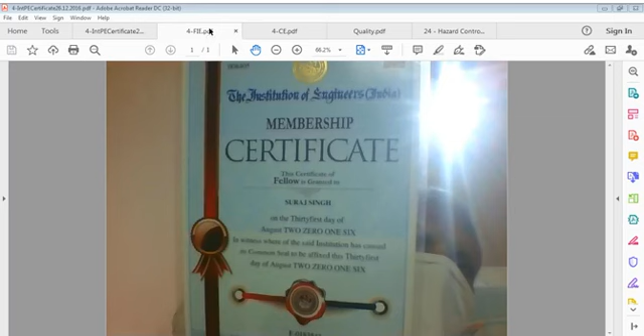Certificate is valuable only if you work, if you use that. Certificate has got no meaning if your product says no. Again I say, certificate is no guarantee. It's only a nameplate, nothing else. If you can't give quality, do not claim that you are a certified person. I don't accept a person who claims to be certified but whose product is quality-less.

That is a very important point I am making. It's not a joke. It's a question of transactions of billions and trillions of dollars around the world. You may say maybe you're expensive, maybe you're not, it doesn't matter. Expense doesn't come into the picture.

Maybe I am telling this, maybe there are millions of people who have the same experience, but some come out loudly and some digest it, because maybe I have bad time, I got a bad product, others don't, but I don't believe it.

When there is a lapse in quality, it's not for one product, it's for the complete function of that organization, that workshop, or that manufacturing unit or manufacturing industry. It's everywhere. There can be defects in composition, defects in size, defects in performance, a defect of whatever sort.

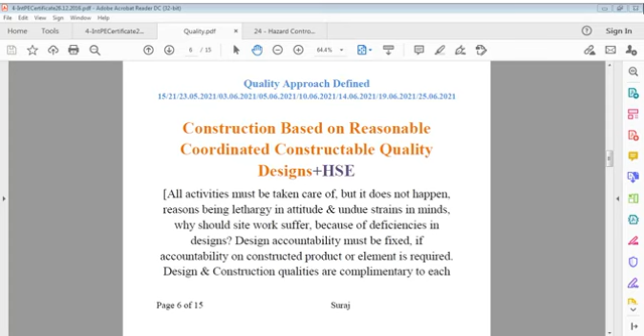Design accountability must be fixed. If accountability for a constructed product or element is required, design and construction or manufacturing qualities are complementary. I don't say that factories don't work properly - they work properly, but they do not care, they do not concentrate, because they start thinking of production only. And they never do proper maintenance, and even if they do, the product should be a good product. It doesn't happen. Or there may be some other problem, some other gap in controls which must be addressed, which must be open to everybody.

In factories or industrial units, everything is defined - method is defined, procedure is defined. But definition is not enough. Just definition on papers is not enough. It should be on work, in hand, in shop, on flow, in manufacturing unit. That should be there. But there is something somewhere incorrect or wrong that causes quality to fall. What is that? That must be discovered and traced out.

Because if you miss quality, the product is missed. If you can't commission, or even successfully commission and it breaks down, it's very disappointing. Yes, if it breaks down after say 1 or 2 years, that is acceptable sometimes because there can be many reasons for that. But if it doesn't work at all, and you are delivered a product you expect will perform well, and you find it's not performing well when you start it, what level of dissatisfaction do you have at that time?

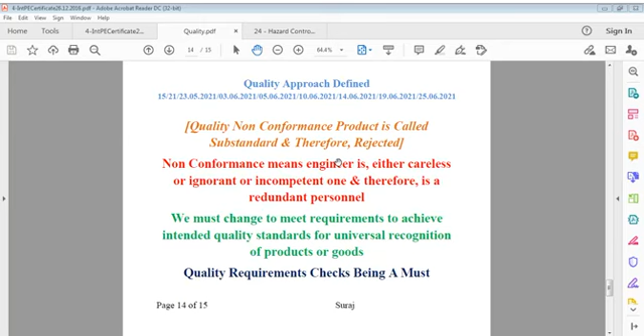Now I'll not go too much in depth of this, because every time I talk about this there's no meaning - I would only say at the end which is missing, what's missing. This simply says: quality non-performance, quality non-conformance product is called substandard and therefore must be rejected. Non-conformance means the engineer is either careless, ignorant, or incompetent, and therefore is redundant personnel. We must change to meet requirements to achieve intended quality standards for universal recognition of products or goods. Quality requirement checks being a must.

This missing factor we have to blame ourselves for regarding quality future failure. Engineering means quality application and continuous improvement of quality. No way exists to not comply with defined or specified quality levels, because definition of quality is a must, and that definition requires to be achieved, or else work leads to a status of being unsuccessful. This is the only message for everyone. It's very important we have to be mindful in that regard.

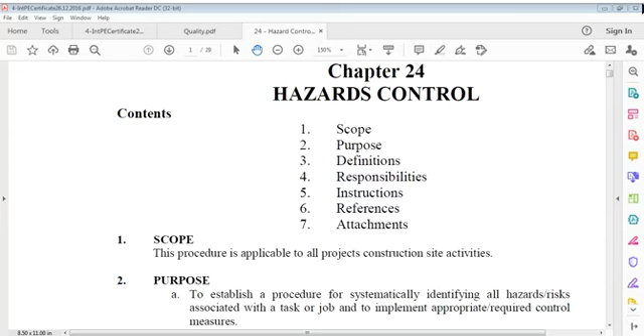Now I go to my safety issue - safety, which we already continued discussion on. Last time too we did: hazards control. Hazards everywhere we have to control. How to control hazards - that point is very important. That briefly I had given, only for consideration these items, these points. But we were discussing about concrete and other items - let's go and see these temporary works, etc. We discussed about excavation, we discussed about control measures and excavation.

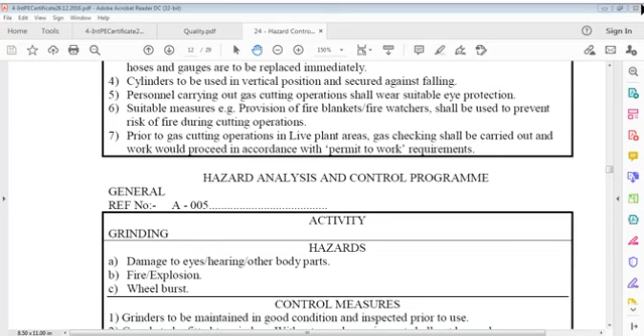We were discussing about cylinders, gas cutting - we were discussing gas cutting. So let us again talk about gas cutting activity. That's also a very important one, it should be discussed properly. Gas cutting, though it's a mechanical engineer's job, no problem - it's a common sense job also. So we can concentrate on this gas cutting. And what are the hazards in that?

Possible hazards: cylinder can explode, eyes can be damaged, fire can break out, and explosion risk in live plants. These can be considered hazards, in rare cases though it happens. And what are control measures? That's also a point now. Oxygen cylinders - we have valve fittings that must be kept free from grease and oil, that we discussed. Flashback arresters must be fitted to these cylinders, because flashback means accident - flash should not go back. Gas hoses - the flashback arrester should be outside the cylinder and not inside, because if it's inside, what shall happen? It shall certainly explode.

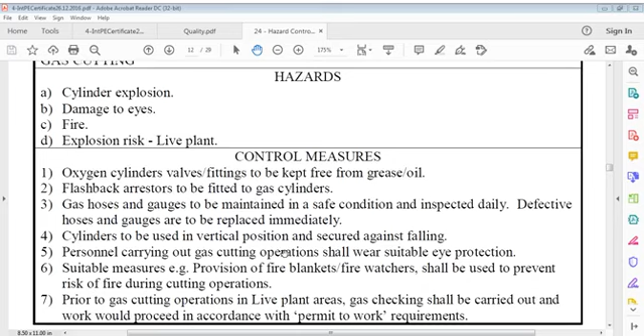Personnel carrying out gas cutting operations shall wear suitable eye protection. It's a must. When we work on gas cutting operations, wearing eye protection is a must.

Suitable measures, that is provision of fire blanket, namely provision of fire blanket and fire watch. I explained last time fire watch, I think you remember that. What we make a fire watch is a very important point. Fire watch, fire lookout, yes, I showed this to you. Fire lookout, I'll refer again to what we discussed, because that's a very important point. Fire watch, tower, etc., whatever it could be, it's very important. And we had discussed this. I'll just show it to you what we discussed, nothing else.

Fire lookout, etc., we discussed that a fire watch is a person assigned duty to look for fire from the top of a building, known as a fire lookout tower. These towers are used in remote areas, normally on mountain tops with high elevation and a good view of surrounding terrain to spot smoke caused by wildfire.

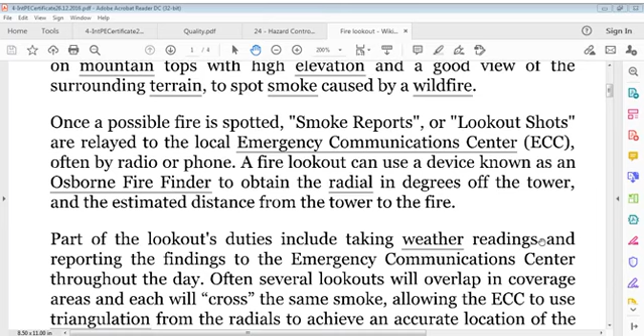We can also say that part of the lookout's duty includes taking weather readings and reporting findings to the emergency communication center, which is there already, and often several lookouts shall overlap. Once a possible fire is spotted, smoke reports or lookout shots are relayed to the local emergency communication center, often by radio or phone. A fire lookout can use a device known as the Osborne Firefinder.

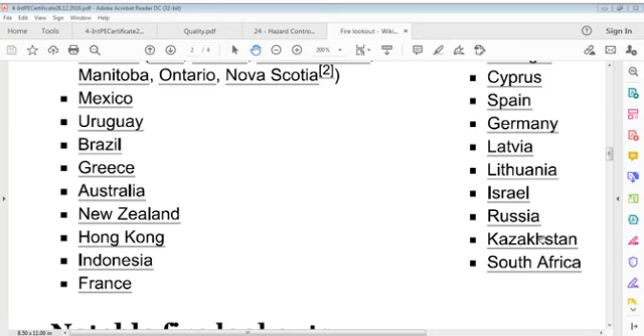And it is liable to survive without any other human interaction. For example, there are names of some countries that use fire lookouts: United States, Canada - in which BC, Alberta, Saskatchewan, Manitoba, Ontario, Nova Scotia, Mexico, Uruguay. These just names, you can see if you can. Hallie Daggett, for example, first female fire lookout for the US.

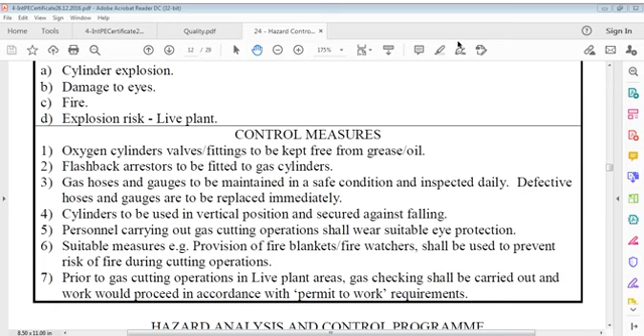Additional information: suitable measures, namely provision of fire blankets and fire watchers, shall be used to prevent risk of fire during cutting operations. Prior to gas cutting operations in live plant areas, gas checking shall be carried out, and work should include hearing protection, because the ear can also be damaged.

Changing of abrasive wheels is to be carried out by trained and authorized personnel only, using proper disc spanners. Personnel carrying out grinding work shall wear suitable eye and hearing protection, and grinding operations in live plant areas shall be carried out in accordance with permit to work requirements. Grinding operations shall be controlled in order to prevent risk of injury to other personnel from sparks and metal splinters. Immediate medical aid should be made available in case of injury.

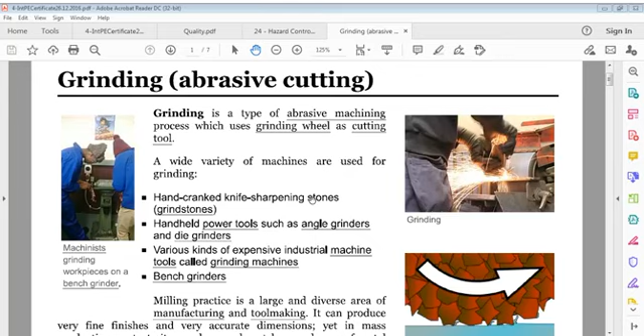Some problem I think in this. So it is grinding, abrasive cutting. Grinding is a type of abrasive machining process which uses a grinding wheel as a cutting tool. A wide variety of machines are used for grinding: hand cranked knife sharpening stones, thus grindstones, then handheld power tools such as angle grinders and die grinders, and various kinds of expensive industrial machine tools called grinding machines, bench grinders.

Here you can say this is a machinist grinding workpieces on a bench grinder, fixed on a bench. So in machining fields, the term cutting is often understood to refer to macroscopic cutting operations, and grinding is often mentally categorized as a separate process. This is why the terms are usually used separately in shop floor practice.

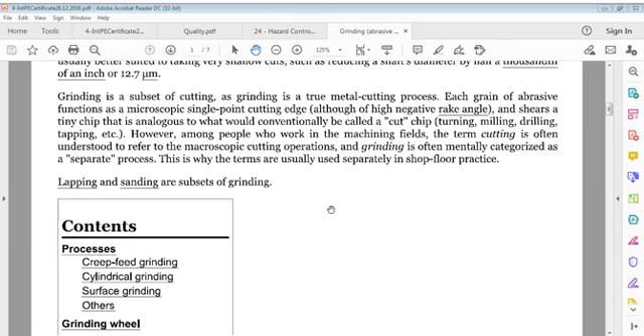Lapping and sanding are subsets of grinding. Softer-grade resin bond are used to keep workpiece temperature low. The disadvantage of a wheel that is constantly degrading requires high spindle power, 51 HP or 38 kilowatts, and is limited in the length of part it can machine.

To address the problem of wheel sharpness, continuous dress creep feed grinding, CDCF, was developed in the 1970s. The wheel is dressed constantly during machining. In CDCF, continuous dress creep feed grinding process keeps the wheel in a state of specified sharpness. It takes only 17 seconds to remove 16 centimeter cube of material, a huge gain in productivity. 38 HP, 28 kilowatt spindle power is required with a lower conventional spindle speed, and the limit on part length was erased.

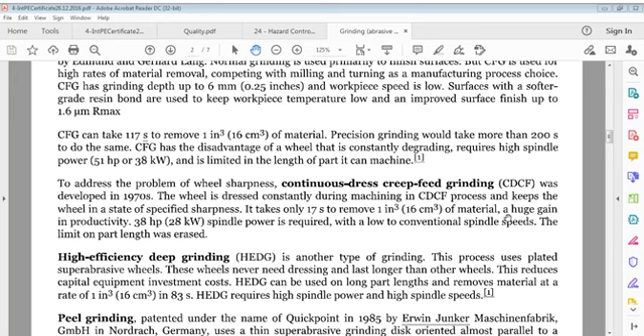Likewise, high efficiency deep grinding (HEDG) is another type of grinding. This process uses plated super abrasive wheels, which never need dressing and last longer than other wheels. This reduces capital equipment investment cost. HEDG can be used on long part lengths and removes material at a rate of 16 centimeter cube in 83 seconds. HEDG requires high spindle power and high spindle speeds.

Peel grinding was patented under the name Quickpoint in 1985 by Erwin Junker Maschinenfabrik GmbH in Nordrach, Germany. It uses a thin super abrasive grinding disc oriented almost parallel to a cylindrical workpiece, operating somewhat like a lathe turning tool.

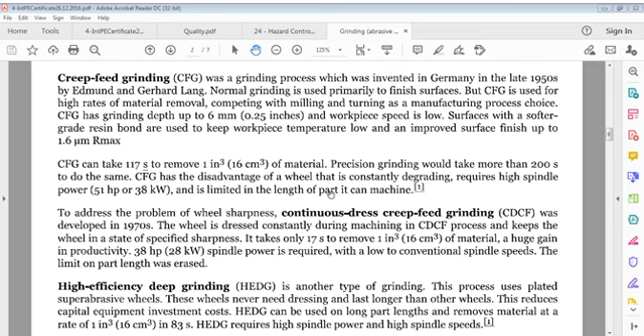So we have gone through how many grindings? Creep feed grinding (CFG), then continuous dress, then high efficiency deep grinding (HEDG), peel grinding, and ultra high speed grinding. Now, cylindrical grinding.

Cylindrical grinding, also called center type grinding, is used to grind cylindrical surfaces and shoulders of a workpiece. The workpiece is mounted on centers and rotated by a device known as a lathe dog or center driver. The abrasive wheel and workpiece are rotated by separate motors at different speeds. The table can be adjusted to produce tapers, and the wheel head can be swiveled.

Five types of cylindrical grinding are: outside diameter (OD) grinding, inside diameter (ID) grinding, plunge grinding, creep feed grinding, and centerless grinding.

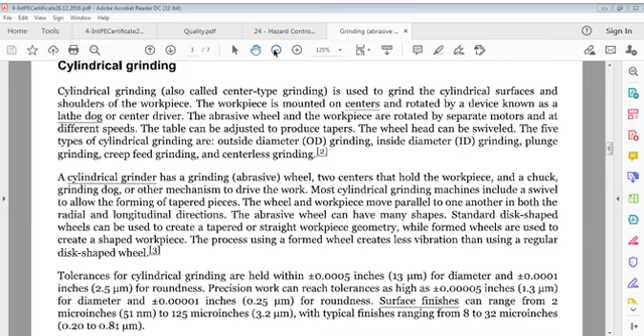I think I should be back in a couple of minutes. Meanwhile, you can go through this. It's better because of daily practice. I have to go, give me 10 minutes please. I'll keep it open and go for that.

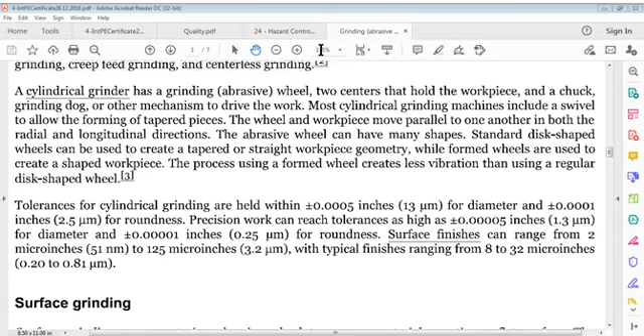Surface grinding uses a rotating abrasive wheel to remove material, creating a flat surface.

Tolerances normally achieved with grinding are 5.1 micrometers for grinding a flat surface and 7.6 micrometers for parallel surfaces. A surface grinder is composed of an abrasive wheel, a work holding device known as a chuck, either electromagnetic or vacuum, and a reciprocating table.

Grinding is commonly used on cast iron and various types of steel. These materials lend themselves to grinding because they can be held by the magnetic chuck commonly used on grinding machines, and they do not melt into the wheel, clogging it and preventing it from cutting. Materials that are less commonly ground are aluminum, stainless steel, brass, and plastics. These all tend to clog the cutting wheel more than steel and cast iron, but with special techniques it's possible to grind them.

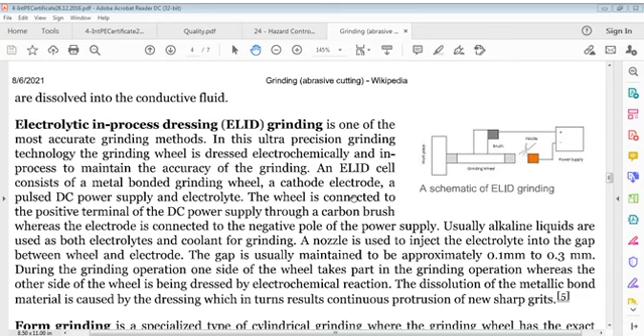An ELID cell consists of a metal bonded grinding wheel, a cathode electrode, a pulsed DC power supply, and electrolyte. The wheel is connected to the positive terminal of the DC power supply through a carbon brush, whereas the electrode is connected to the negative pole of the power supply. Usually alkaline liquids are used as both electrolyte and coolant for grinding.

Alkaline liquids are used as both electrolyte and coolant for grinding. A nozzle is used to inject electrolyte into the gap between wheel and electrode. The gap is usually maintained to be approximately 0.1 mm to 0.3 mm.

During the grinding operation, one side of the wheel takes part in grinding, whereas the other side is being dressed by electrochemical reaction. Dissolution of the metallic bond material is caused by dressing, which in turn results in continuous protrusion of new sharp grit.

Let's blow this diagram up to see it more clearly. It shows the electric circuit, though it's not entirely clear here — let's move on.

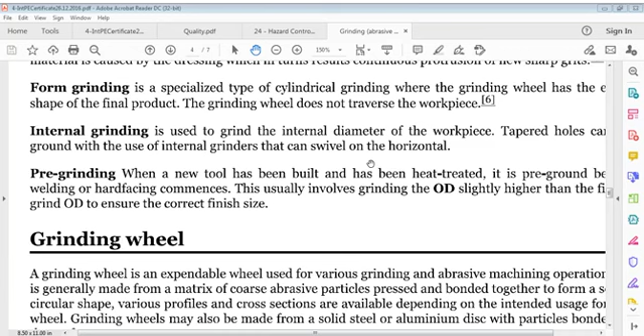Now form grinding: it's a specialized type of cylindrical grinding where the grinding wheel has the exact shape of the final product. The grinding wheel doesn't traverse the workpiece.

Internal grinding is used to grind the internal diameter of a workpiece. Tapered holes can be ground with internal grinders that can swivel on a horizontal axis.

Pre-grinding: when a new tool has been built and heat treated, it's pre-ground before welding or hard facing commences. This usually involves grinding the OD slightly higher than the finish grind OD to ensure correct finish size.

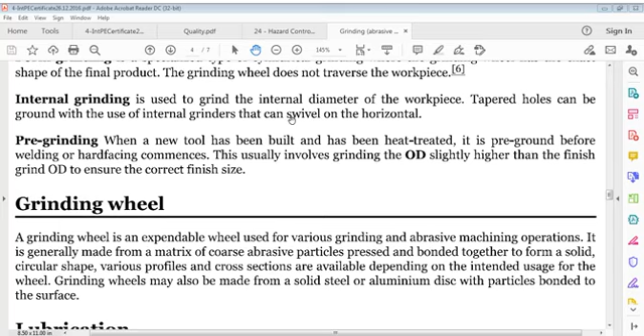A grinding wheel is an expendable wheel used for various grinding and abrasive machining operations. It's generally made from a matrix of coarse abrasive particles, pressed and bonded together to form a solid circular shape. Various profiles and cross sections are available depending on intended uses for the wheel. Grinding wheels may also be made from a solid steel or aluminum disc with particles bonded to the surface.

Lubrication: use of fluids in a grinding process is often necessary to cool and lubricate the wheel and workpiece, as well as remove chips produced in the grinding process.

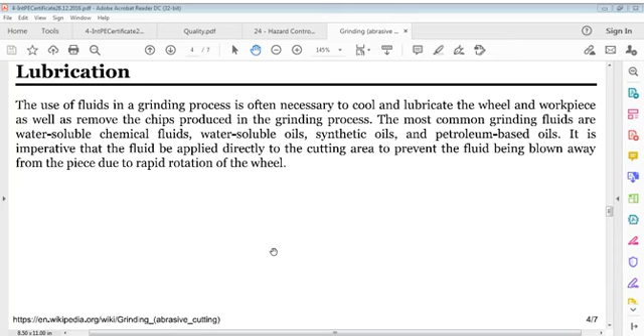The most common grinding fluids are water-soluble chemical fluids, water-soluble oils, synthetic oils, and petroleum-based oils. It's imperative that fluid be applied directly to the cutting area to prevent it from being blown away from the piece due to rapid rotation of the wheel.

The workpiece is manually clamped to the lathe dog, powered by a faceplate that rotates opposite to the grinding wheel, removing small bits as it passes along the wheel. In some instances, special drive centers may be used to allow edges to be ground. The work holding method affects production time as it changes setup time.

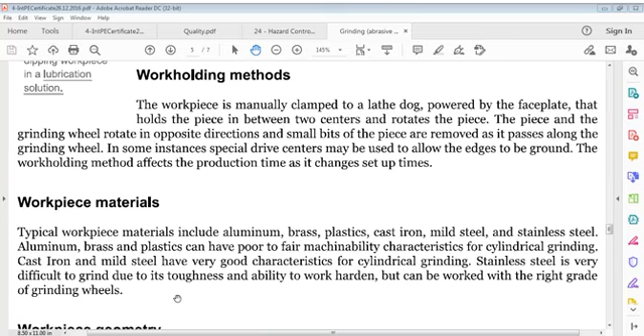Workpiece materials: typical workpiece materials include aluminum, brass, plastics, cast iron, mild steel, and stainless steel. Aluminum, brass, and plastics have poor to fair machinability for cylindrical grinding. Cast iron and mild steel have good characteristics. Stainless steel is very difficult to grind due to its toughness and tendency to work harden, but can be worked with the right grade of grinding wheels.

Workpiece geometry: the final shape of the workpiece is a mirror image of the grinding wheel, with cylindrical wheels creating cylindrical pieces and formed wheels creating formed pieces. Typical workpiece sizes range from 18 mm to 1 meter in diameter and 2 cm to 4 meters in length, although pieces from 6 mm to 1.5 meters in diameter and 8 mm to 2.5 meters in length can be ground. Resulting shapes can be straight cylinders, straight-edged conical shapes, or even crankshafts for engines that experience relatively low torque.

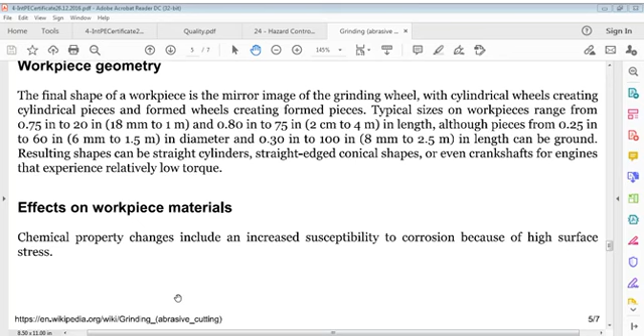Effects on workpiece material: chemical property changes include increased susceptibility to corrosion because of high surface stress. Mechanical properties will change due to stresses put on the part during finishing. High grinding temperatures may cause a thin martensitic layer to form on the part, which leads to reduced material strength from micro cracks. Physical property changes include possible loss of magnetic properties on ferromagnetic materials.

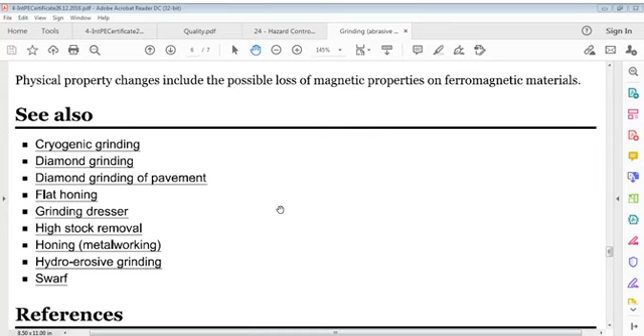And there we have cryogenic grinding, diamond grinding of pavements, flat honing, grinding dressers, high stock removal, honing, metal working, hydro-erosive grinding swarf. And then there are references, which are of no meaning.

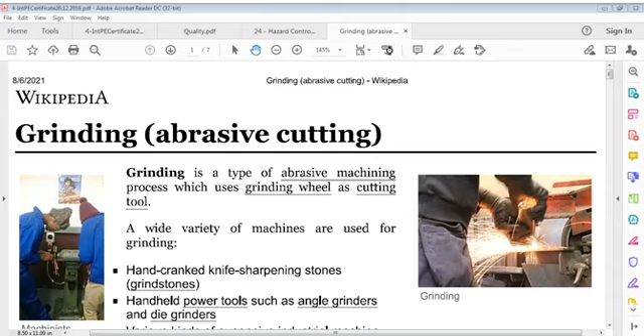Let us go back here. This was that we like to, we try to, I like just to save it and okay, grinding abrasives is just already there. Now I'll close this file after a review of this. We have gone through this, and I'd like to go back for more information. Let's go back for information about this, and that could be, let's say, if I can get something back to Firewatch. I think yesterday I could not get everything, so let's see if we can get something.

Let's see what's that. Okay, let me see. Not much in this. Firewatch is a person assigned to keep watch on hot work and fire hazards. Let us see if it's possible. Let's find some information on this for you.

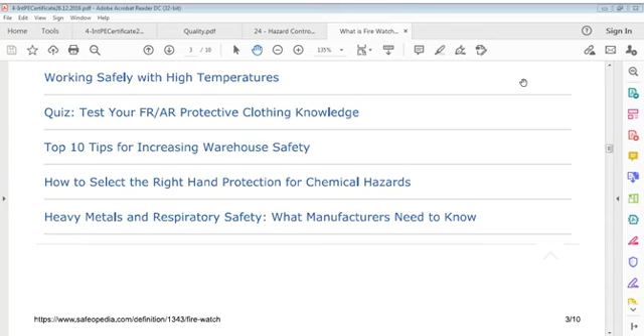There is not much in this, I should not waste time on this. There's some safety signs here, so I think it's no use, leave it. So let's go back here and find something else.

What's this? Firewatch Wikipedia, what is Firewatch? So what is this, Firewatch alarm? What does it say? It's also exactly important.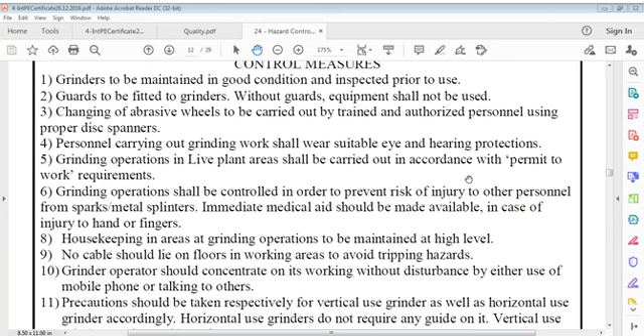I was here, Firewatch search, find... no, it's not that. So let's see here what we're discussing about. It is again, so we discussed about grinders and we discussed about that. So we go further here.

In this we were discussing grinding, and it says grinding operations in live plant areas shall be carried out under conditions of permit to work, and grinding operations shall be controlled in order to prevent risk of injury to other personnel from sparks, metal splinters. Immediate medical aid should be made available in case of injury to hand or fingers. Housekeeping in areas of grinding operation to be maintained at a high level. No cable should lie on floors in working areas to avoid tripping hazards.

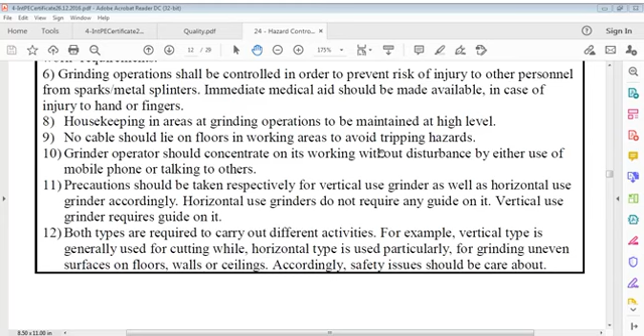Grinder operator should concentrate on their working without disturbance by either use of mobile phone or talking to others - this is a very important part. Precautions should be taken respectively for vertical use grinders as well as horizontal use grinders accordingly. Horizontal use grinders do not require any guide, while vertical use grinders require a guide on it. Both types are required to carry out different activities - for example, vertical type is generally used for cutting, while horizontal type is used particularly for grinding uneven surfaces on floors, walls or ceilings. Accordingly, safety issues should be cared about.

Now we come to welding - an activity that also carries hazards with it. Which hazards can it have? Damage to body parts. It can result in fire, explosion, electrocution, health impairment.

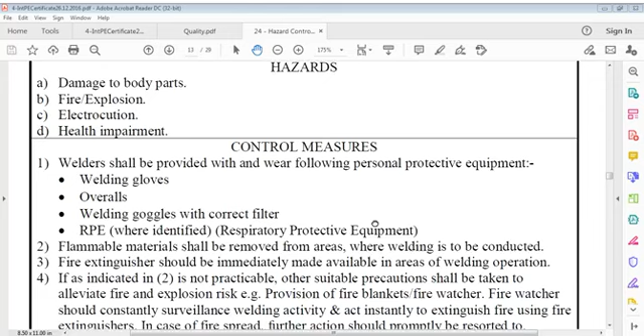This is all about welders. Welding is a very important part, and it says control measures are welders should be provided with and wear the following personal protective equipment: welding gloves, overalls, welding goggles with correct filter, and RPE - that's respiratory protective equipment.

Flammable materials shall be removed from areas where welding is to be conducted. Remove flammable materials from that area. Fire extinguishers should be immediately made available in areas of welding operation.

If it's not practicable to remove these materials, other suitable precautions shall be taken to alleviate fire and explosion risk, namely provision of fire blankets, fire watchers. Fire watcher should constantly surveil welding activity and act instantly to extinguish fire using fire extinguishers. In case of fire spread, further action should promptly be resorted to.

Before welding operations are carried out, materials involved and their byproducts shall be identified, risks assessed, and necessary control measures identified in order to prevent possible respiratory disease, systemic poisoning, namely from cadmium, stainless steel, galvanized or lead coated materials. Welding cables and cable joints shall be maintained in good condition.

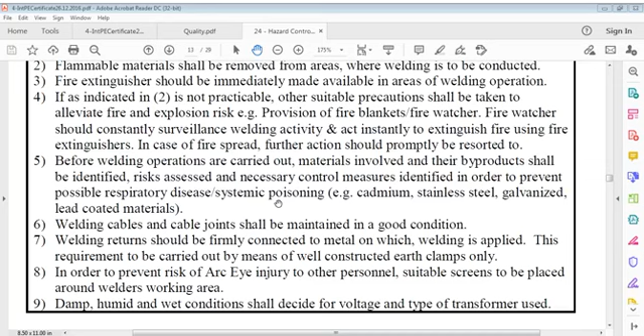Welding returns should be firmly connected to metal on which welding is applied. This requirement is to be carried out by means of well-constructed earth clamps only. In order to prevent risk of arc eye injury to other personnel, suitable screens should be placed around the welder's working area. Damp, humid and wet conditions shall decide the voltage and type of transformer used.

We should understand this, it's a very important point. Meanwhile, just a minute please, let me go back. What to do, I have to open some door.

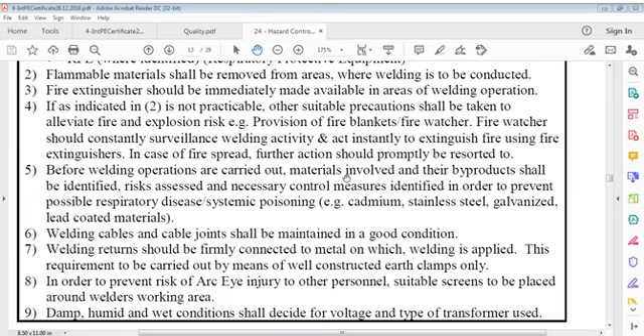Welding returns should be firmly connected to metal on which welding is applied. This requirement is to be carried out by means of well-constructed earth clamps only. In order to prevent risk of arc eye injury to other personnel, suitable screens are to be placed.

Now we go to another topic, diesel engines in process areas. What does diesel engine process area mean? That's the activity. Engine exhaust fire and over-speeding of engine in live plant - these are the hazards, meaning engine exhaust fires and over-speeding of engines.

Control measures: spark arresters to be fitted to diesel engine exhaust. Chalwyn valves shall also be fitted where needed.

Diesel engines, we talked of diesel generators earlier. Now diesel engines, we are talking of what this means. We have to be very careful about this. Diesel engines, we have to see what it says about them. Diesel engines, what do you mean by that?

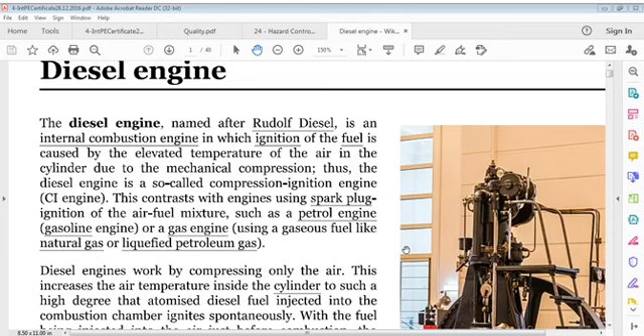I again repeat this: diesel engine is named after Rudolf Diesel. Diesel engine is an internal combustion engine in which ignition of fuel is caused by elevated temperature of air in the cylinder due to mechanical compression applied. Thus, diesel engine is so-called a compression ignition engine, CI engine. This contrasts with engines using spark plug ignition of air-fuel mixture such as petrol engine, gasoline engine, or a gas engine using a gaseous fuel like natural gas or liquefied petroleum gas.

Diesel engines work by compression, compressing only air. This increases air temperature inside the cylinder to such a high degree that atomized diesel fuel injected into the combustion chamber ignites spontaneously, with fuel being injected into air just before combustion.

Dispersion of fuel is uneven. This is called a heterogeneous air-fuel mixture. The torque a diesel engine produces is controlled by manipulating the air-fuel ratio lambda. Instead of throttling intake air, the diesel engine relies on altering the amount of fuel that is injected, and the air-fuel ratio is usually high.

The diesel engine has the highest thermal efficiency of any practical internal or external combustion engine due to its very high expansion ratio and inherent lean burn, which enables heat dissipation by excess air. A small efficiency loss is also avoided compared with non-direct injection gasoline engines, since unburned fuel is not present during valve overlap, and therefore no fuel goes directly from intake injection to exhaust.

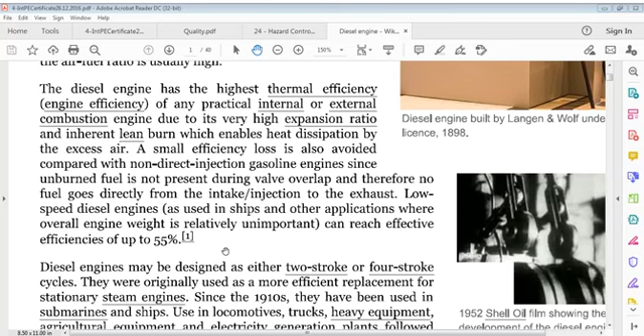Diesel engines may be designed as either 2-stroke or 4-stroke cycles. They were originally used as a more efficient replacement for stationary steam engines. Since 1910, they have been used in submarines and ships. Use in locomotives, trucks, heavy equipment, agriculture equipment, and electricity generation plants followed later. In the 1930s, they slowly began to be used in a few automobiles.

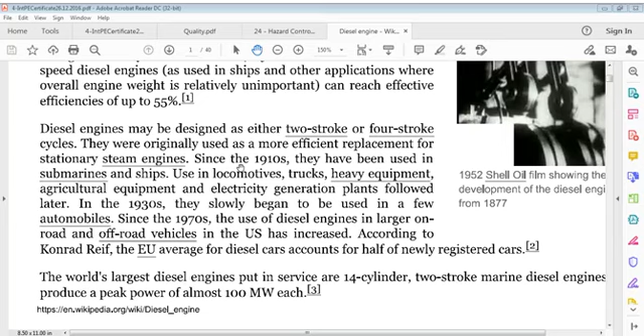Since the 1970s, use of diesel engines on road and off-road vehicles in the US has increased; on average, diesel cars account for half of newly registered cars. The world's largest diesel engines put in service are 14 cylinders. Two-stroke marine diesel engines produce a peak power of almost 100 megawatts each.

Now, I'm not going to tell all this. Let's look at Diesel's idea and the history, the figure behind that.

In 1878, Rudolf Diesel, who was a student of Polytechnicum in Munich, attended lectures of Carl Linde. Linde explained that steam engines are capable of converting just 6 to 10% of heat energy into work, but that the Carnot cycle allows conversion of much more heat energy into work by means of isothermal change in condition. According to Diesel, this ignited the idea of creating a highly efficient engine that could work on the Carnot cycle. Diesel was also exposed to a fire piston, a traditional fire starter using rapid adiabatic compression principles, which Linde had acquired from Southeast Asia.

After several years of working on these ideas, Diesel published them in 1893 in an essay, Theory and Construction of a Rational Heat Motor. Diesel was heavily criticized for his essay, but only a few found the mistake that he made. His rational heat motor was supposed to utilize a constant temperature cycle with isothermal compression that would require a much higher level of compression than that needed for compression ignition. Diesel's idea was to compress air so tightly that the temperature of the air would exceed that of combustion.

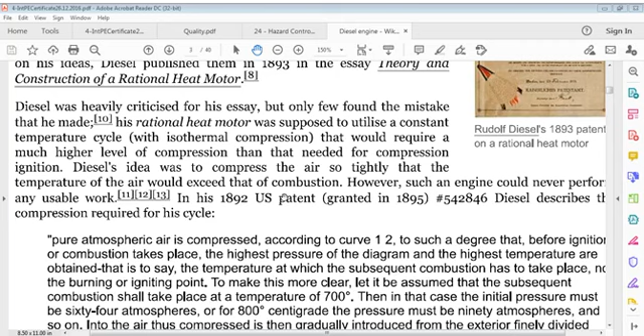However, such an engine could never perform any usable work. In his 1892 US patent, Diesel describes the compression required for his cycle.

Pure atmospheric air is compressed according to curve 1-2 to such a degree that before ignition or combustion takes effect, the highest pressure and highest temperature are obtained, that is to say, the temperature at which subsequent combustion has to take effect, not the burning or ignition point. To make this more clear, let it be assumed that subsequent combustion shall take effect at a temperature of 700 degrees Celsius.

Then in that case, the initial pressure must be 64 atmospheres, or for 800 centigrade, the pressure must be 90 atmospheres, and so on. Into the air thus compressed is then gradually introduced from the exterior finely divided fuel, which ignites on introduction.

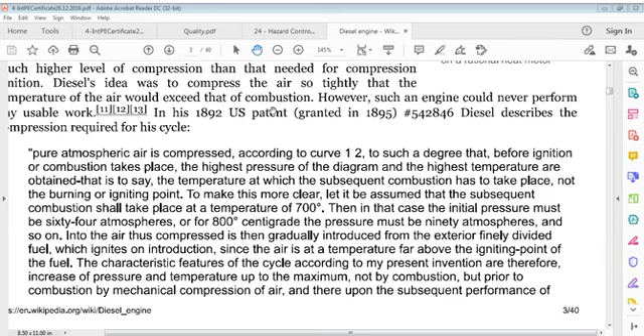Since the air is at a temperature far above the igniting point of the fuel, the characteristic features of the cycle according to my present invention are therefore an increase of pressure and temperature up to a maximum, not by combustion but prior to combustion by mechanical compression of air, and thereupon subsequent performance of work without increase of pressure and temperature by gradual combustion during a prescribed part of the stroke, determined by cut-off.

By June 1893, Diesel had realized his original cycle would not work, and he adopted the constant pressure cycle. Diesel described the cycle in his 1895 patent application. Notice that there is no longer a mention of compression temperatures exceeding the temperature of combustion. Now it's simply stated that compression must be sufficient to trigger ignition.

In an internal combustion engine: a combination of a cylinder and piston constructed and arranged to compress air to a degree producing a temperature above the igniting point of fuel; a supply of compressed air or gas; a fuel supply; a distributing valve.

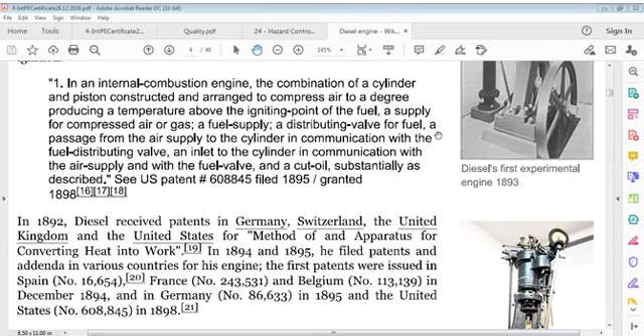in US patent files. In 1892, Diesel received patents in Germany, Switzerland, United Kingdom and United States for a method of and apparatus for converting heat into work. In 1894 and 95, he filed patents and addenda in various countries for his engine. First patents were issued in Spain, France and Belgium in December, and in Germany in 1895, and in the United States in 1898.

Diesel was attacked and criticized over a time period of several years. Critics had claimed that Diesel never invented a new motor and that the invention of the diesel engine is a fraud. Otto Kohler and Emil Capitaine were two of the most prominent critics of Diesel at the time. Kohler had published an essay in 1887 in which he describes an engine similar to the engine Diesel described in his 1893 essay. Kohler figured that such an engine could

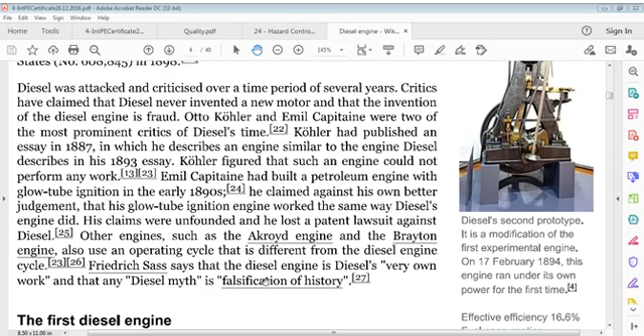First diesel engine. We have to go further and see what it says. It says: first diesel engine, talking of Diesel, sought out firms and factories that would build his engine.

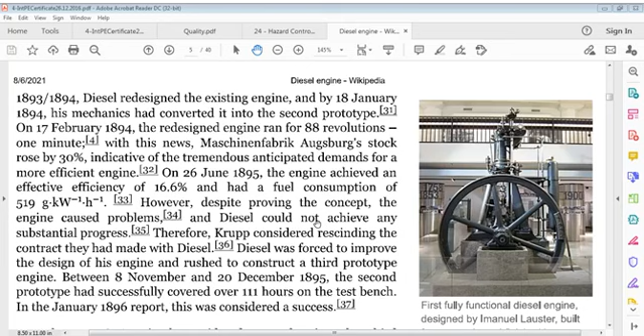In February 1896, Diesel considered supercharging the third prototype. Emanuel Lauster, who was ordered to draw the third prototype, motor 250-400, had finished the drawings by 30 April 1896. During summer, the engine was built. It was completed in 1896.

Tests were conducted until early 1897. First public tests began on 1st February 1897. Moritz Schroter's test on 17 February was the main test of Diesel's engine. The engine was rated at 13.1 kilowatts with specific fuel consumption like this. And that's all. Now we go back to the book. These are important for us. Let's see.

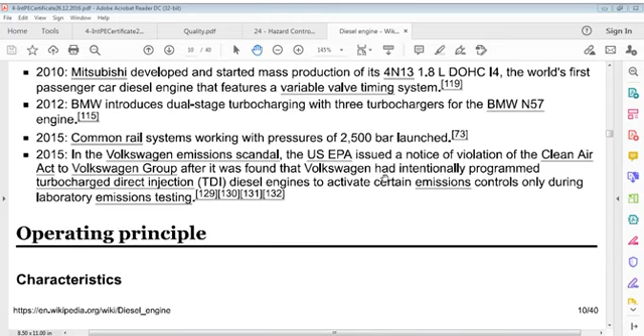Operating principle, characteristics. Now, what's the characteristics of a diesel engine? Characteristics of a diesel engine are: compression ignition. Due to almost adiabatic compression, fuel ignites without any ignition-initiating apparatus such as spark plugs. Mixture formation inside the combustion chamber: air and fuel are mixed in the combustion chamber and not in the inlet manifold.

Number 1, compression ignition: due to almost adiabatic compression, fuel ignites without any ignition-initiating apparatus such as a spark plug. Mixture formation inside the combustion chamber: air and fuel are mixed in the combustion chamber and not in the inlet manifold. Torque adjustment solely by mixture quality.

Torque adjustment is achieved solely by mixture quality, instead of throttling the air-fuel mixture. The amount of torque produced is set solely by the mass of injected fuel, always mixed with as much air as possible. This creates a heterogeneous air-fuel mixture, where dispersion of air and fuel in the combustion chamber is uneven, resulting in a high air ratio. Because diesel engines always run on as much air as possible and don't depend on an exact mixture, they have an air-fuel ratio leaner than stoichiometric: lambda V is greater than or equal to lambda minimum, which is greater than or equal to 1.

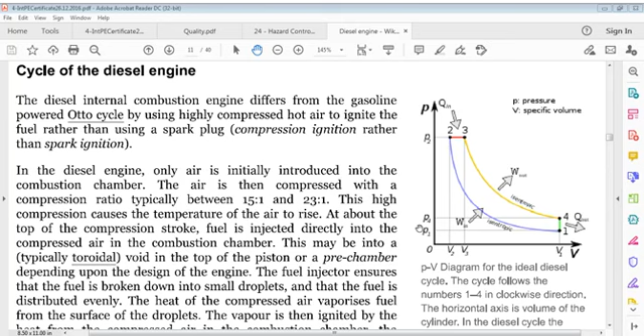At about the top of the compression stroke, fuel is injected directly into the compressed air. In the combustion chamber, this may be into a typically toroidal void in the top of the piston, or a pre-chamber, depending upon the design of the engine. The fuel injector ensures that the fuel is broken down into smaller droplets and that the fuel is distributed evenly.

The heat of the compressed air vaporizes fuel from the surface of the droplets. The vapor is then ignited by heat from the compressed air in the combustion chamber. Droplets continue to vaporize from their surfaces and burn, getting smaller, until all fuel in the droplets has been burned.

Combustion occurs at substantially constant pressure during the initial part of the power stroke. The start of vaporization causes a delay before ignition, and the characteristic diesel knocking sound, as vapor reaches ignition temperature and causes an abrupt increase in pressure above the piston.

When combustion is complete, combustion gases expand as the piston descends further. High pressure in the cylinder drives the piston downward, supplying power to the crankshaft, as well as a high level of compression allowing combustion to take effect without a separate ignition system.

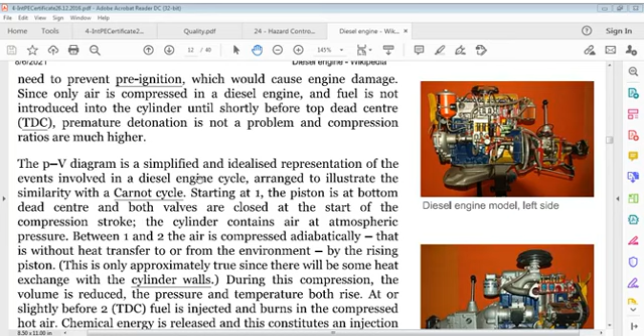Air is compressed adiabatically, that is, without heat transfer to or from the environment, by the rising piston. This is only approximately true, since there shall be some heat exchange with the cylinder walls. During this compression, volume is reduced, and pressure and temperature both rise. Slightly before TDC, fuel is injected and burns in the compressed hot air, releasing chemical energy, which constitutes an injection of thermal energy, heat, into the compressed gas.

Combustion and heating occurs between points 2 and 3. In this interval, pressure remains constant since the piston descends and volume increases, while temperature rises as a consequence of the energy of combustion. At point 3, fuel injection and combustion are complete, and the cylinder contains gas at high temperature.

Between points 3 and 4, this hot gas expands, again approximately adiabatically, and work is done on the system to which the engine is connected. During this expansion phase, the volume of gas rises, and its temperature and pressure both fall.

At point 4, the exhaust valve opens and pressure falls abruptly to atmospheric. This is unresisted expansion, and no useful work is done by it. Ideally, adiabatic expansion should continue, extending line 3-4 to the right until pressure falls to that of the surrounding air. But the loss of efficiency caused by this unresisted expansion is justified by the practical difficulties involved in recovering it.

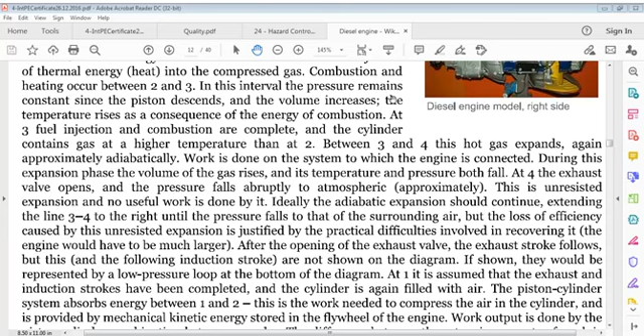This point is provided by mechanical kinetic energy stored in the flywheel of the engine. Work output is done by the piston-cylinder combination between points 2 and 4. The difference between these two increments of work is the indicated work output for the cycle, represented by the area enclosed by the PV loop.

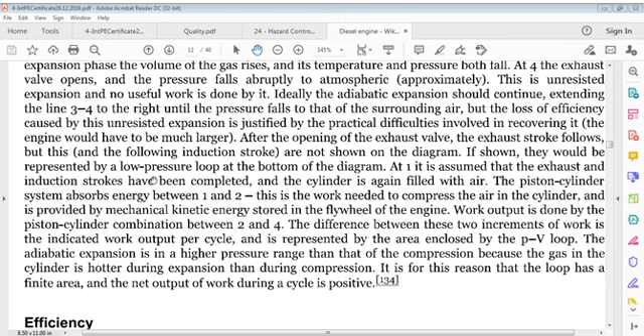Adiabatic expansion is in a higher pressure range than that of compression, because the gas in the cylinder is hotter during expansion than during compression. It's for this reason that the loop has a finite area, and the net output of work during a cycle is positive.

Where is that? This is that. Point 1, point 2, point 3, point 4, output. P is pressure, V is volume, specific volume. This is the PV diagram for the ideal diesel cycle.

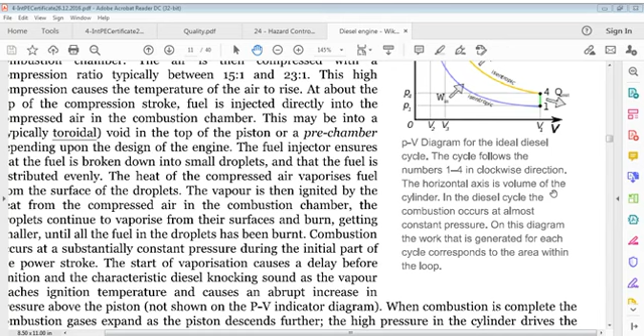The cycle follows number 1 to 4, 1 to 4, 1 to 4, here in the clockwise direction. The horizontal axis is the volume of the cylinder. In the diesel cycle, combustion occurs at almost constant pressure. On this diagram, the work that is generated for each cycle is within the loop.

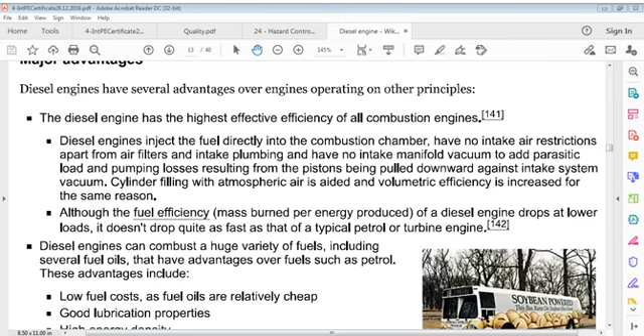Let's see if I can save it or not. I forgot I saved it. Let us save it. Then the diesel engine section, it's there already, it's no problem. I'll go back to it, I'll speak about this later. Now we go back to our paper here. That is here, I was talking of its activity. Diesel engines, I think I explained enough on that. We'll talk later on.

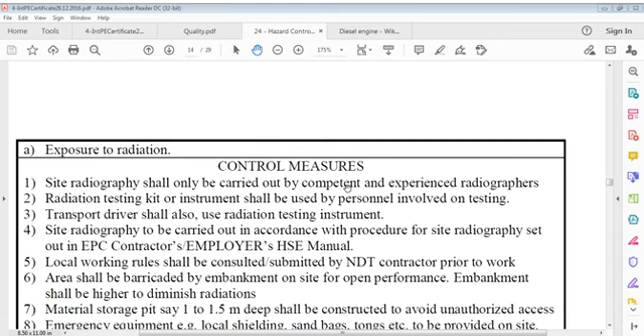And then we have the activity, that is radiography, mechanical installation. In these, the hazards are of different types. Radiography control measures, and we have to see that.

Site radiography shall only be carried out by competent and experienced radiographers. Radiation testing kit or instruments shall be used by personnel involved in testing. Transport drivers shall also use radiation testing instruments.

Site radiography to be carried out in accordance with the procedure for site radiography set out in the EPC contractor's employer's HSE manual. Local working rules shall be consulted, submitted by the NDT contractor prior to work.

The area shall be barricaded by embankments on site for open performance. Embankment shall be higher to diminish radiation. Material storage pits, say 1 to 1.5 meters deep, shall be constructed to avoid unauthorized access.

Emergency equipment, namely local shielding, sandbags, tongs, etc., to be provided on site. Warning signs, barriers, flashing lights, alarms, etc., to be provided.

Trefoil warning signs shall show RPO address, telephone, and location. Radiation meters to be calibrated and certification obtained. Contractors' personnel located in adjacent working area and security staff to be notified in advance. General notification respecting radiations to be circulated to all.

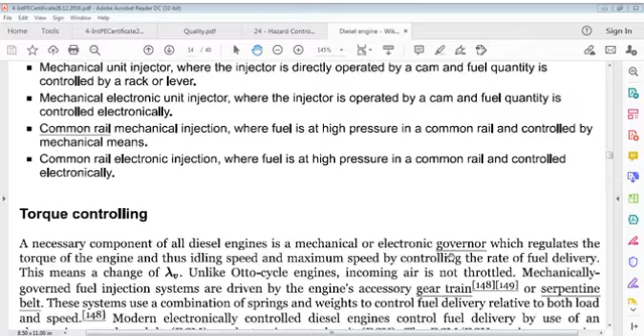Diesel engine is something special. Fuel injection, we'll see controlling that later on because it's a long file.

Let's say I had some before. I had some radiography file in this, if I can remember. I had some radiography file. I can come back into that.

Management documents - this is HSE, and that's HSE procedures, and radiography file is there, something I don't know. Let's say grinding, hazards control, hazard safety, working, hoisting, rigging.

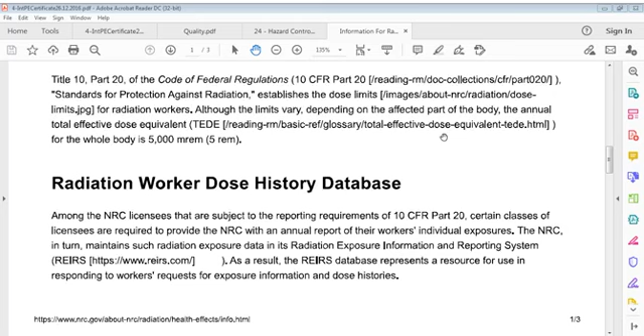And for radiation workers, measuring radiations - so it was information for radiation workers. It was, yes, I remember. It was this one, this was information of radiation workers. That was his information. I think you remember those radiation workers, history database, radiation workers.

And also then it was another one, case of radiation, that is radiation workers, and that's measuring radiations. It is also the same, we remembered. We can discuss this later again, because I can't do it now. We'll see how it works. So we are saying we have gone through this.

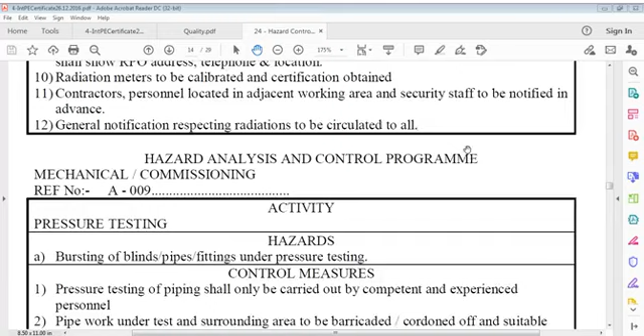Now we'll go to another one, that is activity: pressure testing. Hazards: pressure testing, bursting of blinds, pipes, fittings under pressure testing. Control measures for this hazard of bursting of blinds, pipes, fittings under pressure testing. So, pressure testing we're talking of here. Pressure testing of piping shall only be carried out by competent and experienced personnel.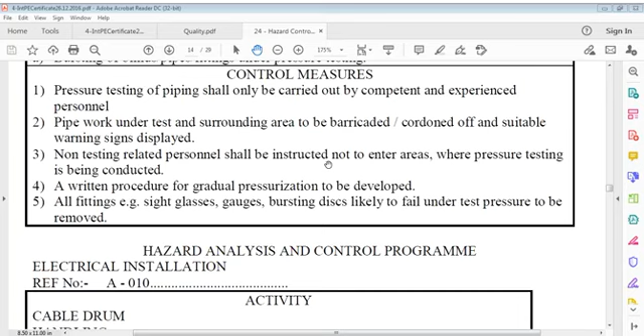It's everywhere in every activity. Pipe work under test and surrounding area to be barricaded, cordoned off, and suitable warning signs displayed. Non-testing related personnel shall be instructed not to enter areas where pressure testing is being conducted. A written procedure for gradual pressurization to be developed. All fittings, namely sight glasses, gauges, bursting discs, likely to fail under test pressure, to be removed.

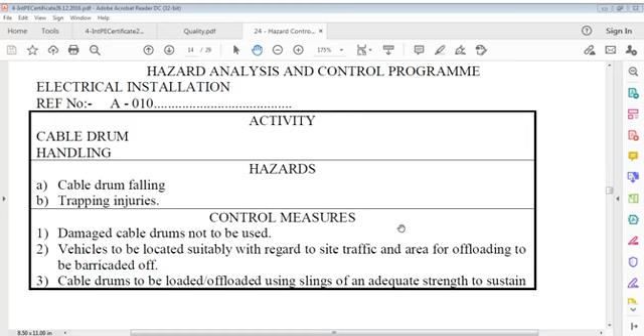Cable drum handling. Hazard is cable drum falling, trapping injuries. There's hazards and drum falling, cable drum falling, trapping injuries. Measures: damaged cable drums not to be used.

Vehicles to be located suitably with regard to site traffic and area for offloading to be barricaded off. Cable drums to be offloaded using slings of an adequate strength to sustain working load safely. This operation is to be carried out by experienced and competent personnel.

Cable jacks to be placed on even surfaces. Cable drums shall be located on cable jacks of suitable capacity and base designed for this purpose. Protruding nails on cable drums to be removed, bent over. Cable drums to be checked when stored.

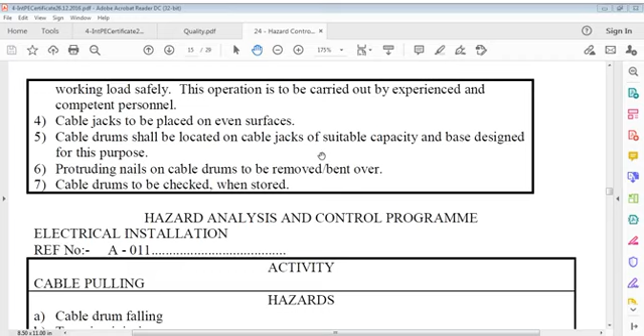So what you say here is cable drum falling is one hazard, trapping injury is another. It says damaged cable drums not to be used - that's one point of measure. Vehicles to be located suitably with regard to site traffic and area for offloading to be barricaded off. Cable drums to be offloaded using slings of adequate strength to sustain working load safely.

This operation is to be carried out by experienced and competent personnel. Cable jacks to be placed on even surfaces. Cable drums shall be located on cable jacks of suitable capacity and base designed for this purpose. Protruding nails on cable drums to be removed, bent over. Cable drums to be checked when stored.

Cable jacks, let us see what it says about that. Okay, that's one point here. I'll show you what's that actually. It's better.

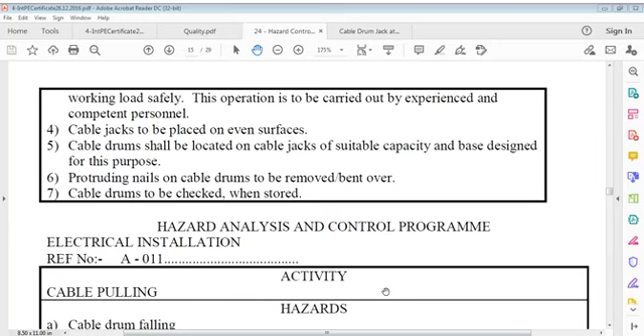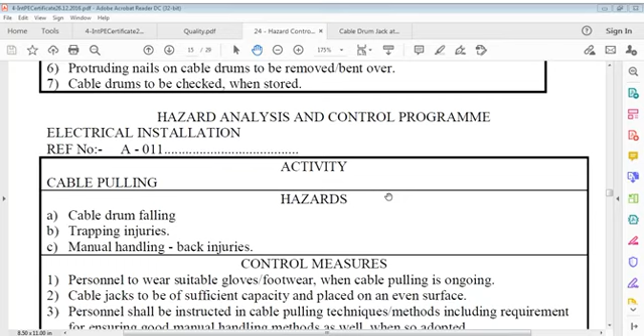And we have to go further on electrical installation. This was of electrical installation as well. I cannot say it's not electrical installation, it is. So this is also another one. It says hazards, cable pulling. Let's think of cable pulling. It says cable pulling. Cable pulling.

Here you can see here. So let's say you can print that one. Yes, how can I print this? It's not going to print. Let's say if I can print this way. No, not that way. No, it's not taking. I think there's something wrong here. It's not helping. Print is here, yes. So we can say I'm going to print it.

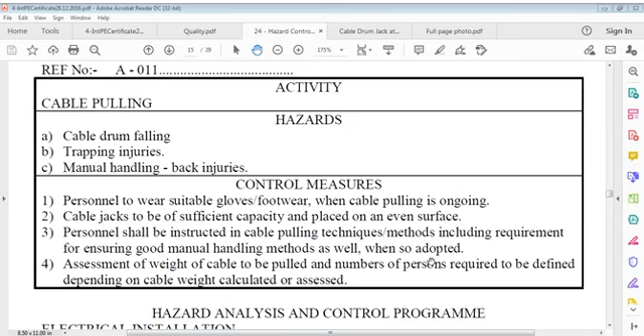And here it says in cable pulling, hazards are cable drum falling, trapping injuries, manual handling, back injuries. Personnel to wear suitable gloves, footwear when cable pulling is ongoing. Cable jacks to be of sufficient capacity and placed on an even surface. Personnel shall be instructed in cable pulling techniques and methods, including requirements for ensuring good manual handling methods as well when so adopted. Assessment of weight of cable to be pulled and number of persons required to be defined depending on cable weight calculated. Hazards analysis programs - this is for cable laying, cable termination.

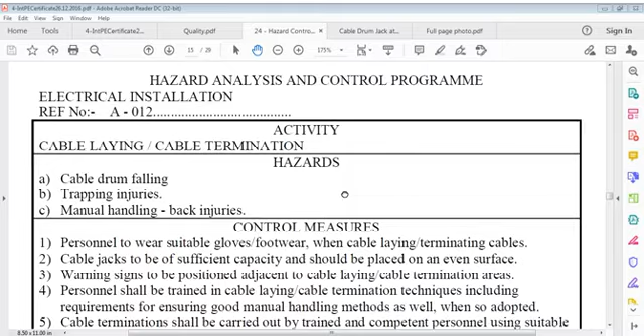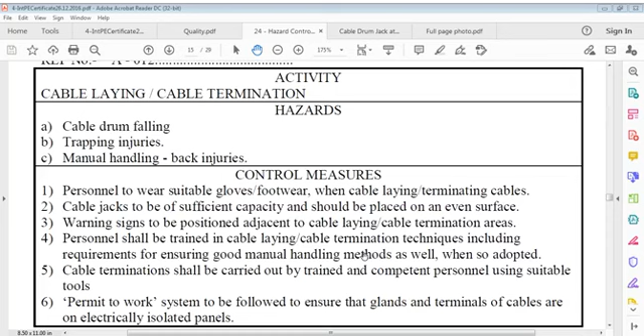Cable drum falling, trapping injuries, manual handling, back injuries, and measures are: person to wear suitable gloves, footwear when cable laying, termination cables. Cable jacks to be of sufficient capacity and should be placed on an even surface. Warning signs to be positioned adjacent to cable laying, cable termination areas. Persons shall be trained in cable laying, cable termination techniques, including requirements for ensuring good manual handling methods as well as when so adopted. Cable termination shall be carried out by trained and competent personnel using suitable tools. Permit to work systems to be followed to ensure that glands and terminals of cables are on electrically isolated panels.

Then it is material handling.